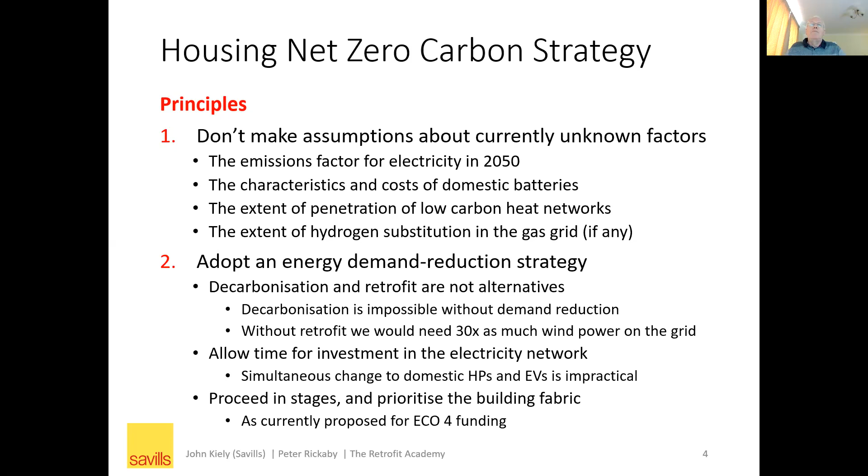We also need to allow time for investment in the electricity distribution network, because if we're going to be moving our housing stock away from fossil fuels like gas towards electric heating, maybe with heat pumps, at the same time as we're all converting our cars to electric vehicles, then we will actually overload the distribution network. So we need to proceed in stages, and we need, in the building sector, to prioritise the building fabric. And that's actually what's currently proposed for ECO4 funding.

Third principle is that we should be focusing first on fuel poverty and then on emissions reduction. And there's a very simple reason for that, because cold households don't care about reducing carbon dioxide emissions. So the key performance indicator initially is SAP, because SAP is a cost-based energy rating, but it will be complemented now and eventually replaced by the environmental indicator, the EI, which is also part of SAP assessments.

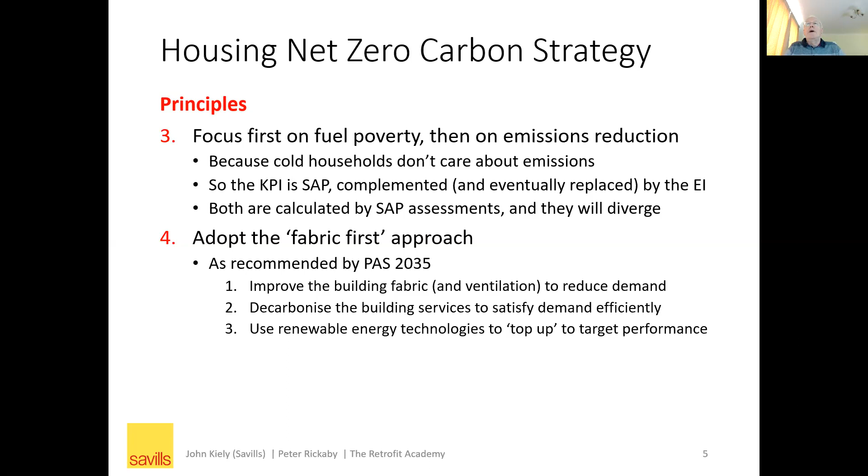Fourth principle is that we should be adopting the fabric first approach, which is recommended by the new comprehensive domestic retrofit standard PAS 2035, Publicly Available Specification 2035. The fabric first approach says, first of all, improve the building fabric and ventilation to reduce demand. Secondly, decarbonise the building services and make them more efficient to satisfy that demand efficiently. And finally, use renewable energy technologies to top up to target performance.

Fifth principle is establish whole house improvement plans, or whole dwelling improvement plans, if you like, for each dwelling type as required by PAS 2035. And the plan should identify your route to net zero carbon ready.

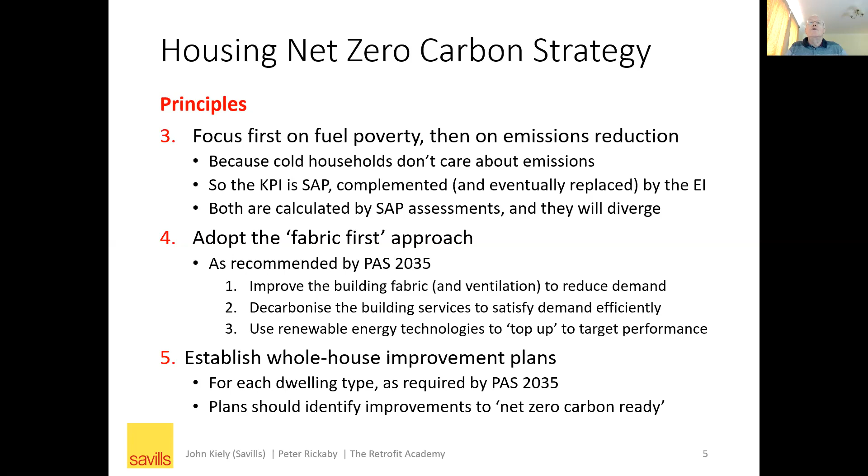So with those principles, we start out with stage one, improving the building fabric to reduce demand. We need to improve the whole building envelope. We need to remember that there's no insulation without ventilation, and PAS 2035 requires ventilation upgrades when we insulate. We should be consistent with BEIS's suggested fabric-focused whole dwelling approach for ECO4, which has potential funding of up to 15,000 per dwelling.

We should accept that some protected and traditionally constructed dwellings cannot be adequately improved, so other dwellings will need deeper retrofit to compensate. And we should be aiming at this stage for SAP 80 to minimise or eliminate fuel poverty. The current EPC Band C, which is a SAP 69 to 80 target, is not really adequate because it provides no headroom, especially in an era of rising fuel prices as we expect to find during the 2020s.

And we should be considering what standards we might adopt. I'll come back to that later, but the best practice Passive House EnerPHit standard might be one that we would consider.

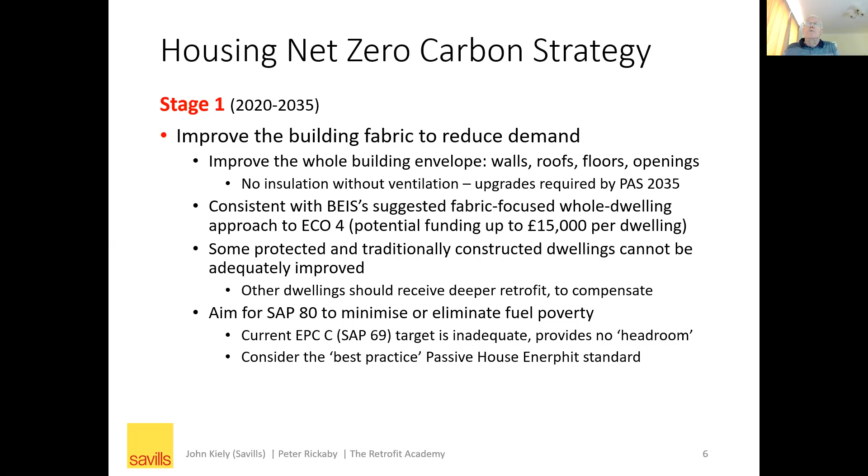Stage 2 is to improve the building services and their controls with a focus on heating, hot water and cooking. We've already done ventilation as part of stage 1, and lighting has already been driven by EU standards. What we need to be doing is removing fossil fuels.

So the options are individual air source heat pumps, perhaps electric induction hobs for cooking, communal ground source heat pumps for blocks and small estates, heat from low carbon heat networks in some urban areas. That's probably the most likely source of low carbon heat for many of us in urban areas. And then possibly hydrogen from the gas network where available after 2035.

We should initially be considering moving from gas boilers to heat pumps via a stage of hybrid heat pumps, which combine a gas boiler with a heat pump, because that will reduce the load on the electricity distribution network, and we can move after 15 or 20 years to pure heat pumps.

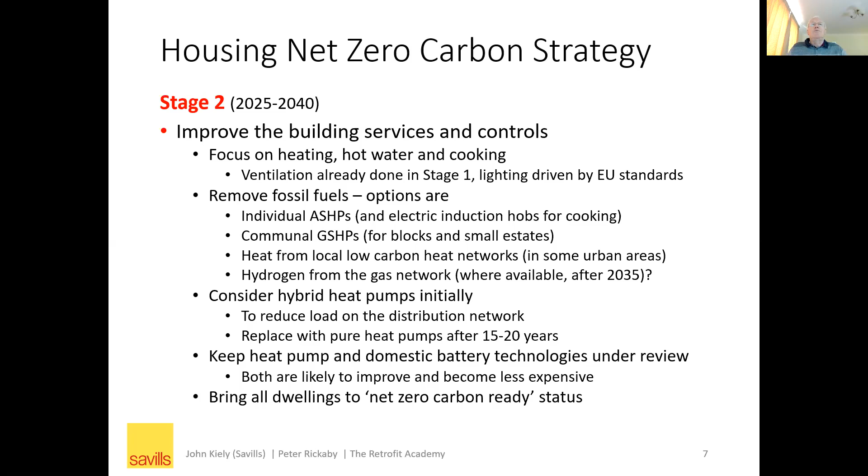We need to keep heat pump and domestic battery technologies under review. I think they'll both improve and become less expensive, and we ought to be aiming by the end of stage 2 to bring all dwellings to net zero carbon ready status.

Stage 3, somewhere between 2035 and 2050, is to add renewable energy technologies to achieve net zero carbon. The provision we need to make will depend on the extent of grid decarbonisation. It may also be constrained by things like the available roof area. The options we'll have are solar PV with battery storage possibly, solar thermal systems for hot water because that will be the biggest thermal load by then. So it would be difficult to ignore solar thermal.

And then community wind power, which is probably the most likely source of low carbon energy, either local or remote, or it may be that if the grid is completely decarbonised, we get it all from the grid. We may also require some solar PV for zero carbon active cooling.

Overheating is the issue that's going to come back to bite us in retrofit, and passive measures, as the current advice advocates, are really not likely to be adequate. So we need to be aware that we might need to have some cooling demand in our dwellings, and of course cooling demand and solar power availability are very well matched. So a certain amount of solar PV on the roof driving a little cooling unit might well be what we all end up doing eventually.

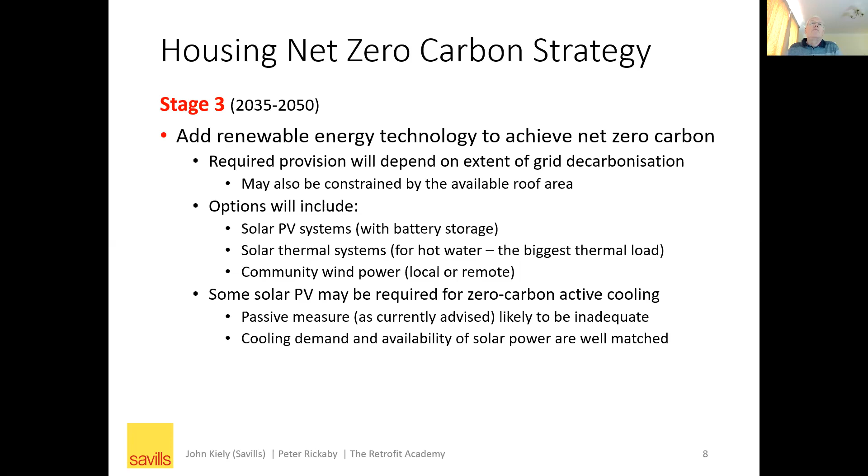When we're implementing this strategy, we need to adopt challenging standards to drive progress. It is not easy to get to net zero carbon ready by 2035 or 40, and then to get to net zero carbon by 2050. And most of us won't be able to afford it, so there's a whole line of work around finance going on that we'll have to get back to. But we certainly ought to be adopting appropriate technical standards.

And I would say that the first of these is PAS 2035 for quality assured retrofit. That includes a risk assessment, a whole dwelling assessment, an improvement option evaluation, and a medium-term improvement plan for every dwelling type, and the employment of retrofit coordinators as required by PAS 2035. We'll come back to the process in a few minutes.

We should be thinking about SAP 80 as our affordable warmth standard to give us headroom to protect against rising fuel prices. We should be thinking about Passive House EnerPHit for energy performance where appropriate and affordable, and we should certainly be using the MCS standards for any of our renewable energy systems.

So to summarize this part of the talk, we need to improve the whole building envelope to reduce heat demand and provide affordable warmth. We need to improve the building services to satisfy demand efficiently, to remove fossil fuels, and to achieve net zero carbon ready by 2035 or 2040. And then we need to top up with renewable energy systems to achieve net zero carbon by 2050. And throughout, we should be adopting best practice standards. We don't have time to retrofit our housing stock twice.

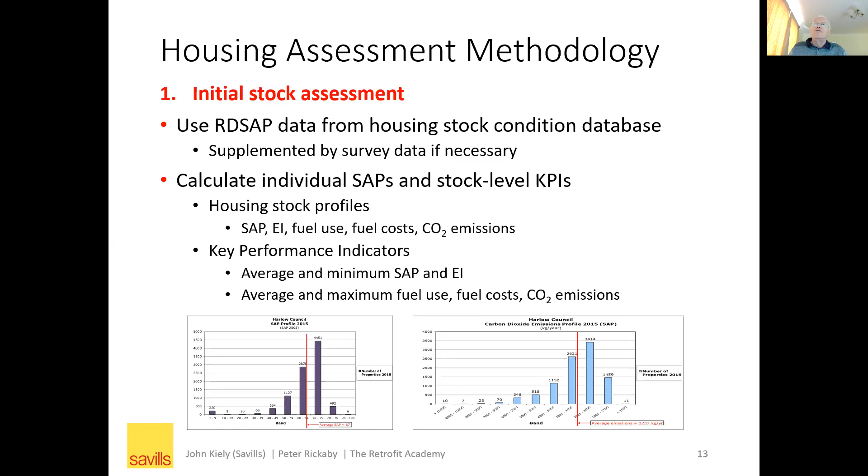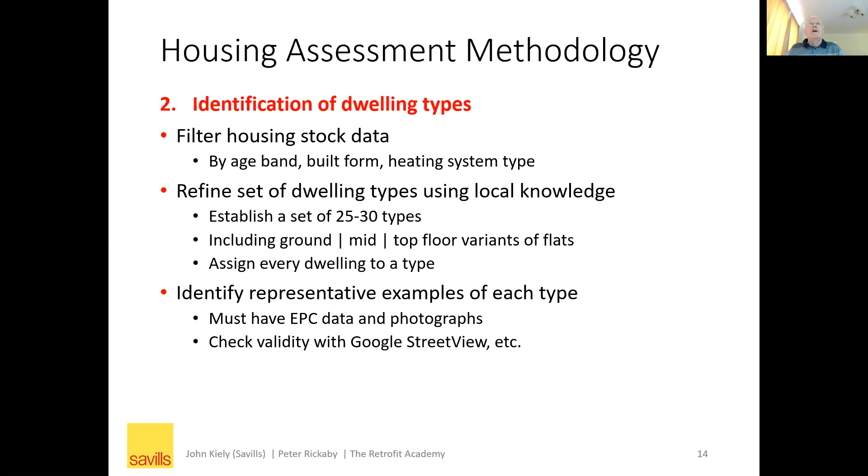And then we need a representative example of each type, for which we must have EPC data, so we've got full SAP data or potentially full SAP data, and photographs, which we can check with Google Street View and things like that, in order that we can move to the third stage, which is an improvement option evaluation, as required by PAS 2035, but basically figuring out what does the dwelling need, what measures do we need to apply to it.

First thing you need to do is a schedule of capital costs for all your improvement measures. We're building those. We have one at Savills, I have one, and lots of housing organisations are beginning to build up robust schedules. For each dwelling type, we need to assess its performance as existing and calculate the performance indicators. And then we need to evaluate improvement options to achieve SAP 80 first, and then net zero carbon ready, all as required by PAS 2035.

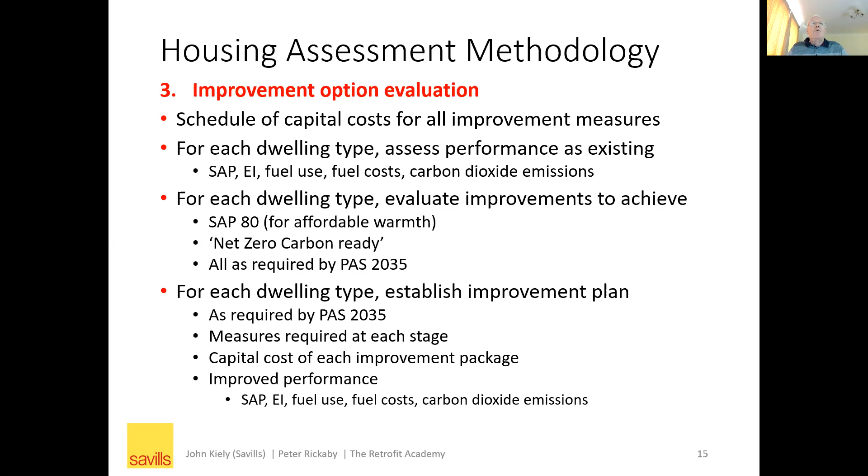For each dwelling type, we then need to establish an improvement plan. What are we going to do to this dwelling type? Again, as required by PAS 2035. What measures are required at each stage? What is the capital cost of the package of measures we're proposing? And what will be the improved performance at the end of the process?

Here, just for illustration, is a cost file, not very informative really, but it's a list of measures with, in the yellow column, agreed costs for each of those measures. Actually, they're cost rates per square metre in this particular case, and a typical social housing cost file will run to several pages covering all the measures, including things like access, like scaffolding and so on.

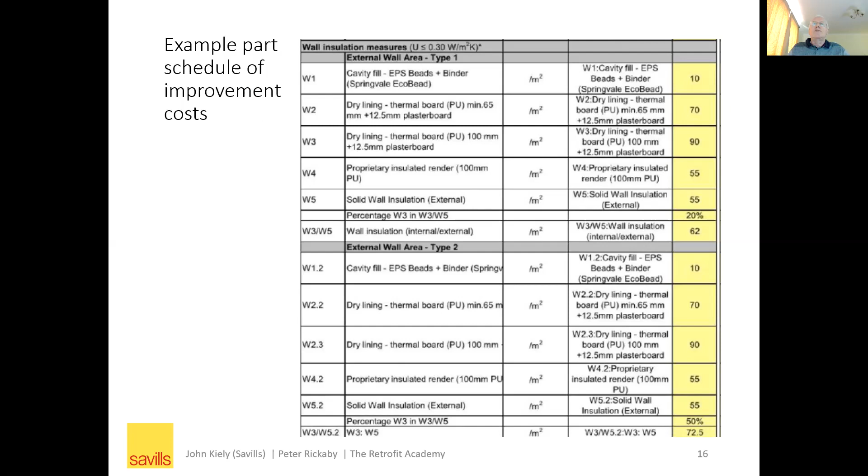Here's the result of a first stage dwelling assessment. This is a house in Harlow that we looked at a few years ago as part of their stock. And here we have the ratings of the unimproved dwelling at the bottom of the screen, the SAP, the EPC, the SAP CO2 emissions, and what a 50% reduction would be, because at the time we were doing this work, net zero carbon ready was about 50% reduction in CO2, we thought.

And then there is a table which breaks down fuel use, energy use, fuel costs, and carbon dioxide emissions by end uses. So we're getting ourselves detailed information about how this dwelling performs.

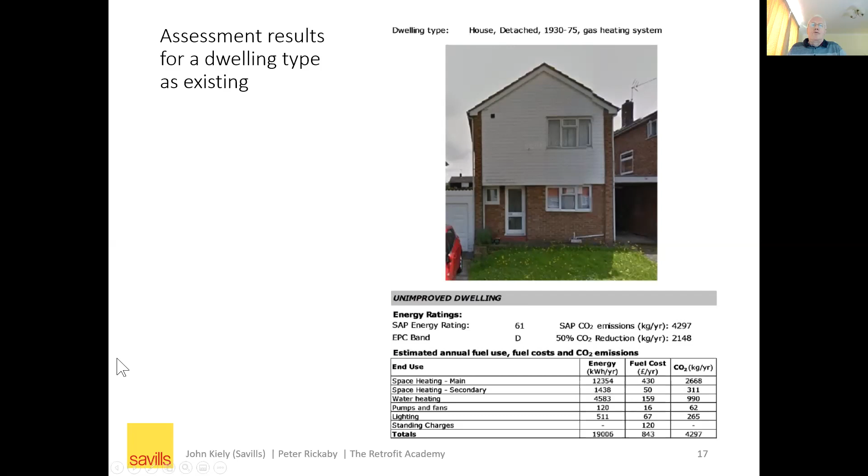Here is an improvement option evaluation. This is a table of measures down the left-hand side to be applied to that particular dwelling with their capital costs from the cost file, or calculated from the cost file, because the cost file contains rates, and then with the fuel cost saving and the CO2 saving in the right-hand columns, and at the bottom of the screen here, the improved performance. Again, fuel use, fuel cost, carbon dioxide emissions broken down by end use.

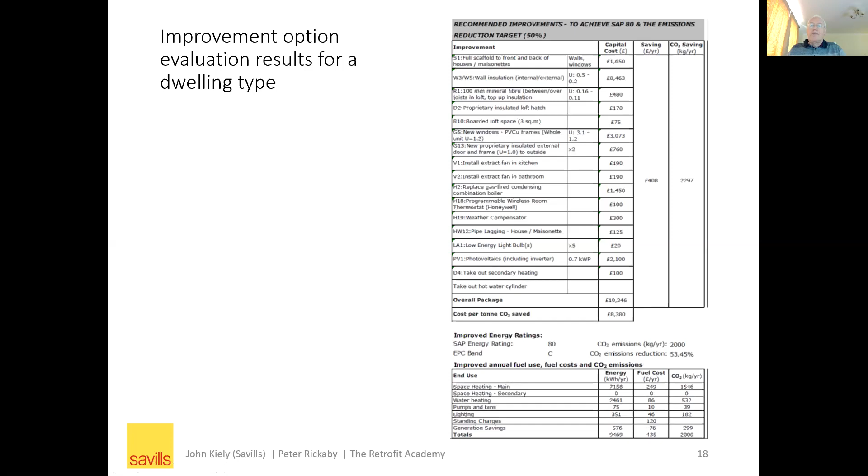Step 4, having done that work for every dwelling type, is to scale up to stock level. So for each dwelling type, we apply the identified improvements to every dwelling of that type. And then we can recalculate the individual SAPs and stock level KPIs. So we can recalculate our housing stock profiles of SAP, EI, fuel use, fuel costs, carbon dioxide emissions.

We can recalculate our energy performance indicators, our key performance indicators, and we can calculate the overall improvement cost for the stock of applying the package identified for each dwelling type to all dwellings of that type. And we can break down the results of that work in lots of ways.

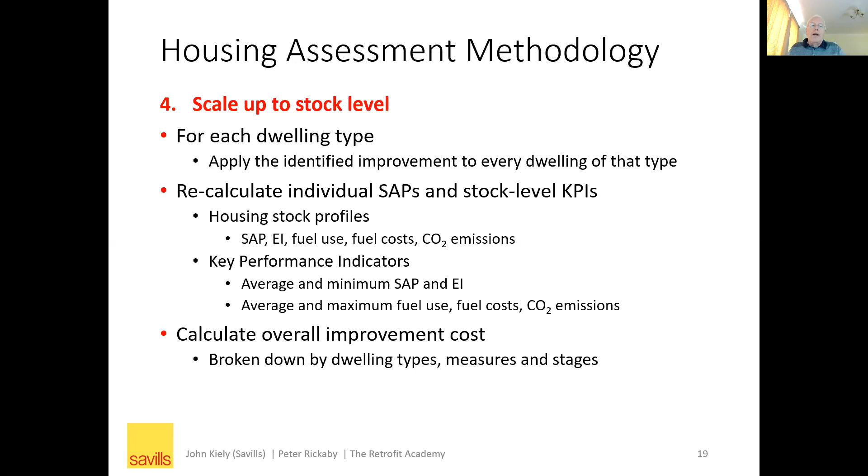Once we've done that, we can start to establish an investment strategy. We can look at our improvement costs. We can identify improvements that are already budgeted for, or perhaps ones we can take out of the current budget, like boiler replacement. We can identify potential external funding, like ECO or other grants. We can consider the integration of the improvements with other programs in the organisation, embracing energy efficiency and planned improvements.

So that might include integrating separate programs for opportunist work, energy intervention, emergency intervention for fuel poverty, shovel-ready plans for external funding, and then an integrated, coordinated whole dwelling improvement approach. And then finally, we can develop a detailed net zero carbon investment plan for the stock.

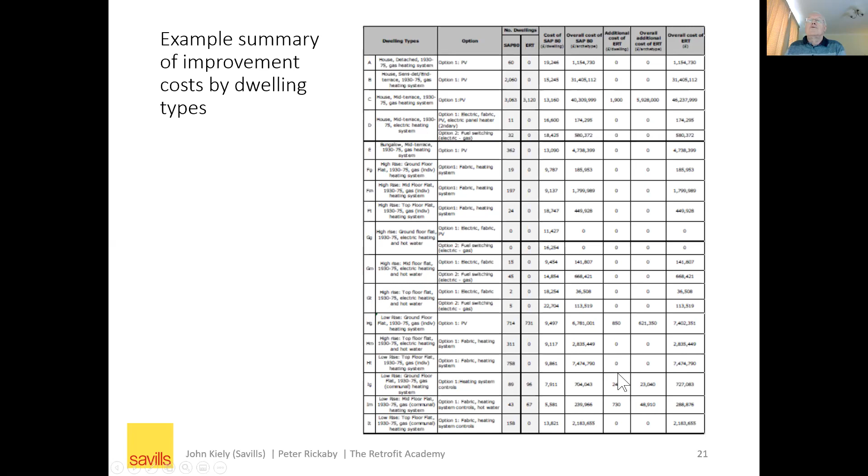And here is a summary of improvement costs by dwelling types. The left-hand column, ABC, is the dwelling types in the stock with descriptions, a number of options perhaps for some of them. And then in each case, we know the number of dwellings, we know the cost of SAP 80, we know the cost in this case of getting to our carbon reduction target, which is 50%. We know the overall additional cost of doing both, and then we can work through and add up all the costs across all the parts of the stock.